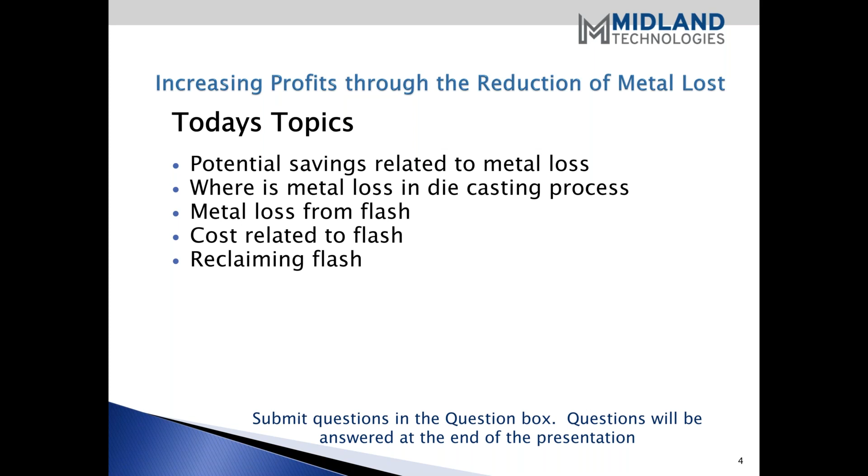Where is metal loss in the die casting process? Metal loss from flash, as we all know, and the cost related to flash, and also reclaiming flash. We'll also cover causes of problems with remelting flash, and methods of reducing flash. We'll actually go through an actual experience with a die caster, and talk about different methods of evacuation and savings calculations. So we've got a lot on our topics today. Again, if you have any questions, please submit them in the question box or chat box, and we'll answer those at the end of the presentation.

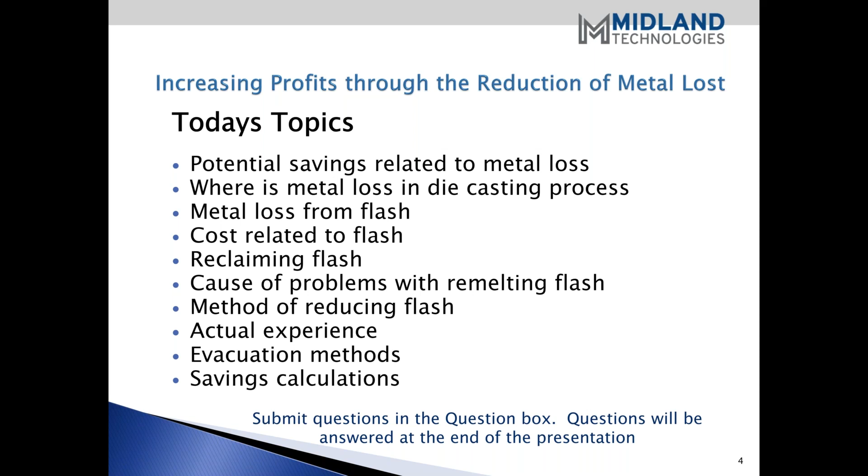The first topic is potential savings related to metal loss. Of course, the advantage of the die casting process is the capability to recycle material, and I think we're all aware that's something each die caster is trying to do. That recycled material can come from runners, overflows, gates, and scrap that can be remelted.

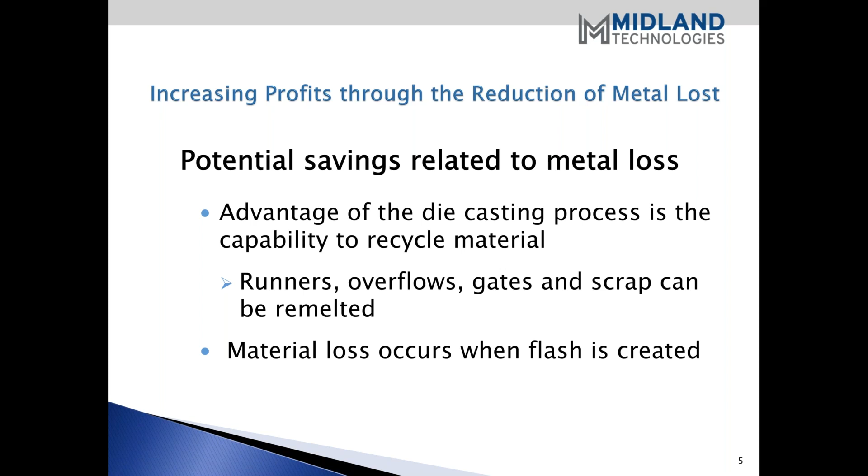Material loss then can occur when flash is created. Where is the metal loss in the die casting process? With flash, overheating metal in breakdown or holding furnaces, and improper metal handling and melting, will produce a scrap casting. Producing scrap casting is where metal loss can occur, and you can only reclaim a percentage of the metal. You can also have loss with biscuits, runners, gates, and overflows, and you can only reclaim a percentage of that metal as well. And of course, flash—unfortunately, flash cannot be reclaimed.

So I'll pass the presentation over to Larry.

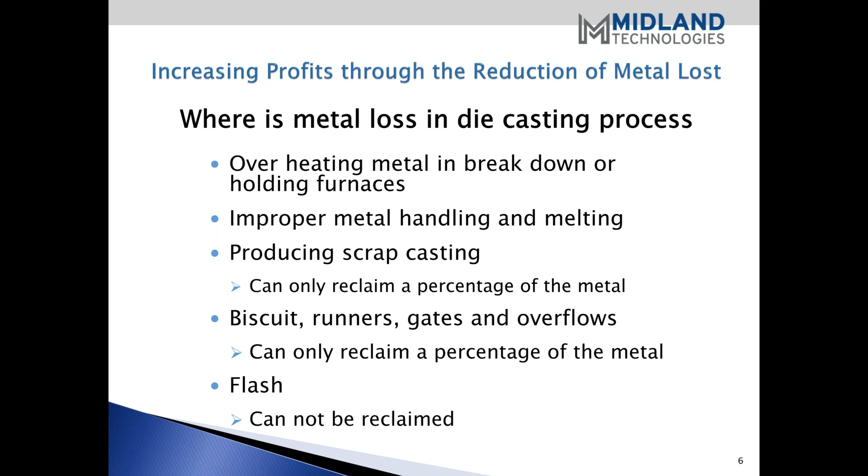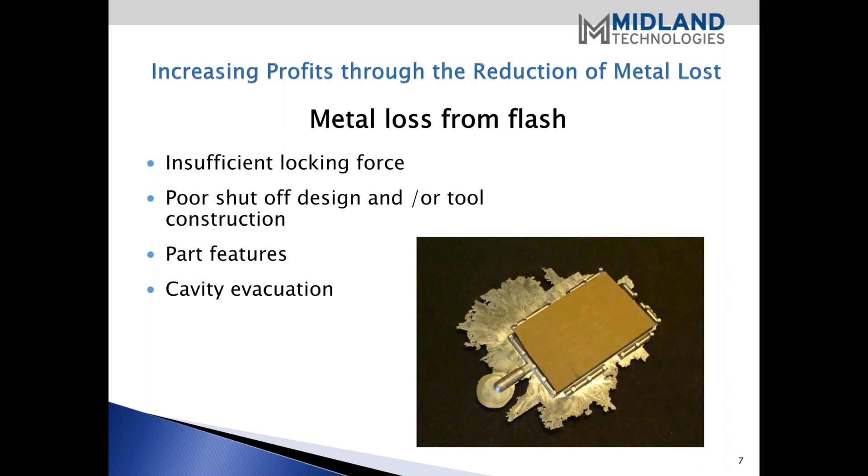Some of the flash, if it's clean, if you talk to your smelter about it, you'll find they'll take the flash back sometimes. Other times you have to dispose of the flash, and in those instances, if you go to a landfill with flash, that's normally a cost to the die caster. And then, of course, you've got the cost of shipping the flash.

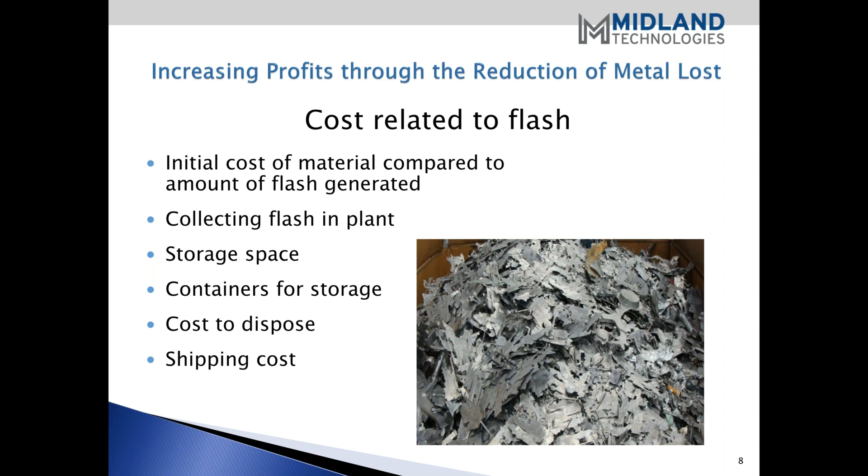Reclaiming flash—flash remelted is not reclaimable. The majority of it is just going to turn into, if you try to remelt it in your plant, and if you've done this, you know that it creates oxides. Those oxides not only affect the alloy itself, but they'll also decrease the efficiency of your remelt furnace.

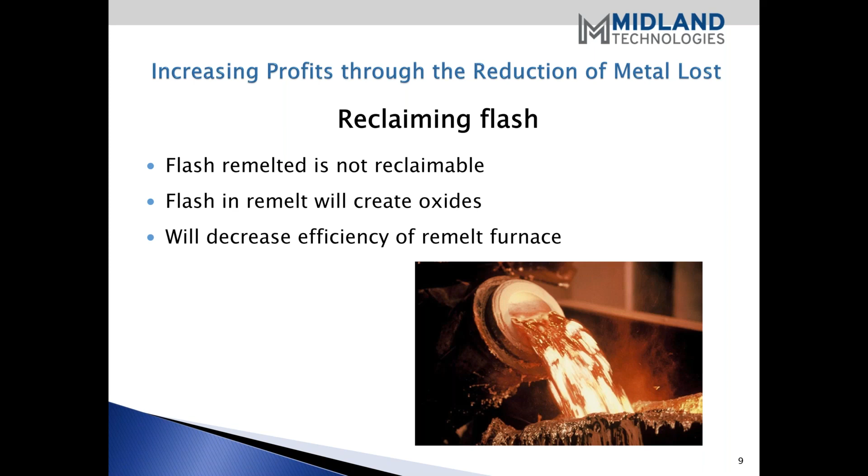So because of reclaiming issues with flash - thin flash, with thickness less than 25 thousandths, is pretty much non-reclaimable. Even smelters we've talked to agree. Our vents, at the atmosphere, are usually no thicker than 5 to 6 thousandths in a conventional vent, so all of that material is totally wasted.

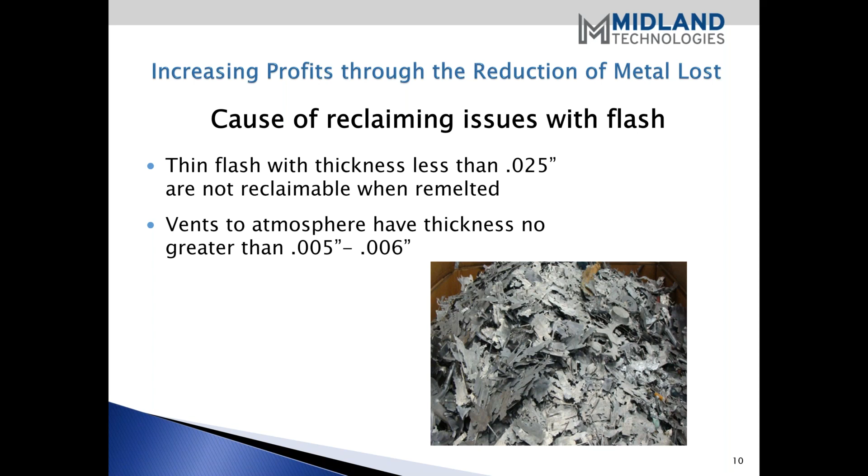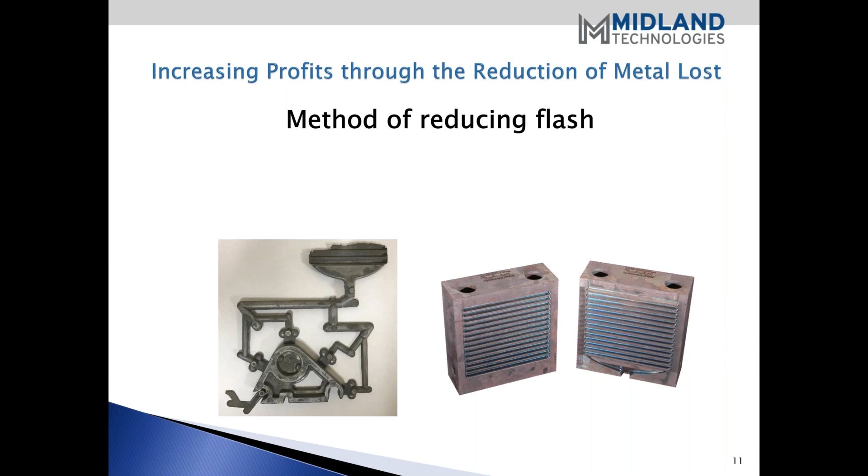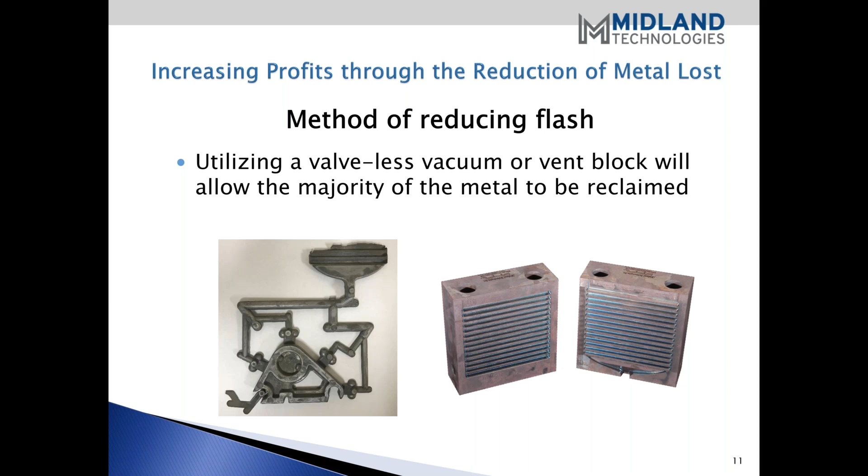Methods of reducing flash would be installing a method or series of runners using either a chill block or a valveless vacuum block. With either one, you can reclaim the majority of the flash as pictured here. The only portion you couldn't reclaim, even though it's over 20 thousandths thick, is the actually serrated portion of the vent or vacuum block, which could not be remelted.

Next we're going to talk about an actual experience that a die caster related to us. This die caster indicated he was losing flash, losing money and metal related to flash that was totally unreclaimable. He had very little success getting the smelter to give him anything for his reclaimed flash. In this instance, he installed a valveless vacuum block and was able to reduce his metal loss.

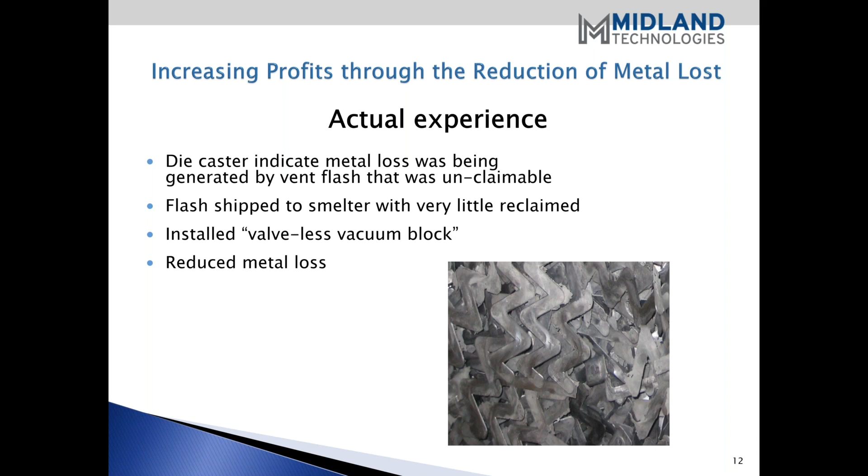Okay, and this is Bill Spracky again. I'll take it on from here. So the ways of reducing the metal loss would be we'll cover some of the evacuation methods.

So everyone's well aware of the conventional vent, where air is being pushed out of the cavity to atmosphere ahead of the metal or with the metal. In these cases, the vent system must be large enough to allow the air to escape. You can see the small area of metal going to atmosphere in the picture. Now the depth from the cavity or overflow to the edge of the insert is typically 20 thousandths, and from the insert to atmosphere you just have a very small depth of 0.005 inches. So it's not a real big area that you can cover with a conventional vent.

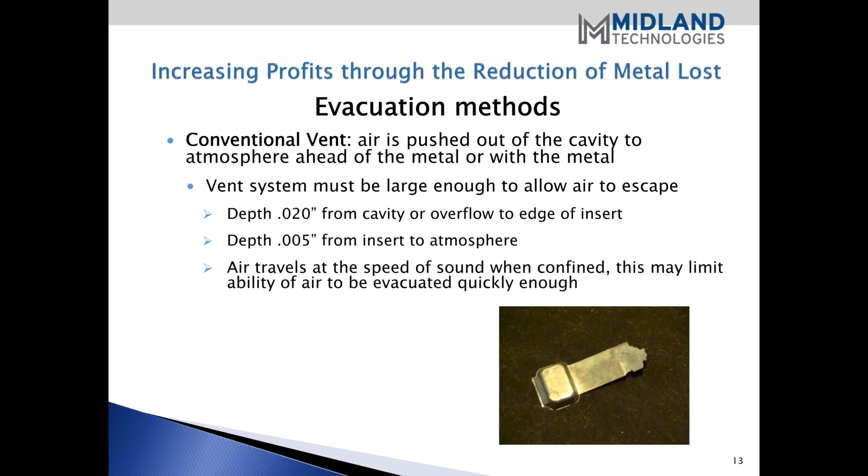Also you have to be concerned with, as the air travels through, air travels at the speed of sound when confined, and this may actually limit the ability of the air to evacuate. And of course, the flash is not reclaimable. You also have a few things that could fail to function, either with spray buildup, flash sticking in the vent, or when the vent gets peened over.

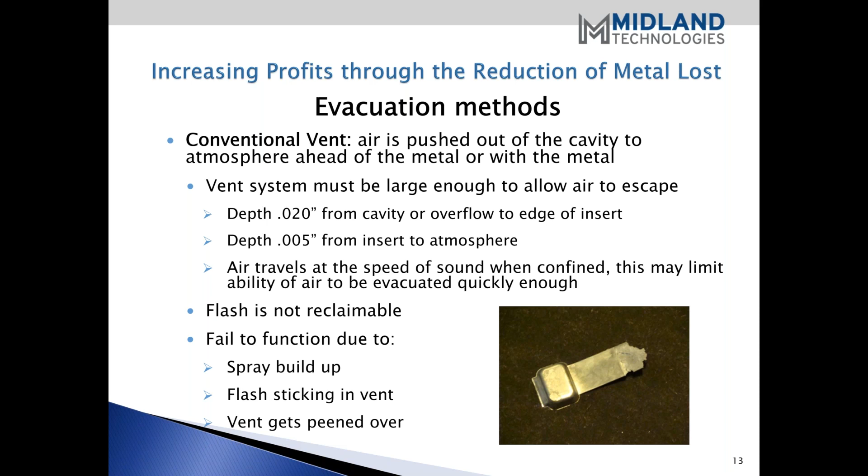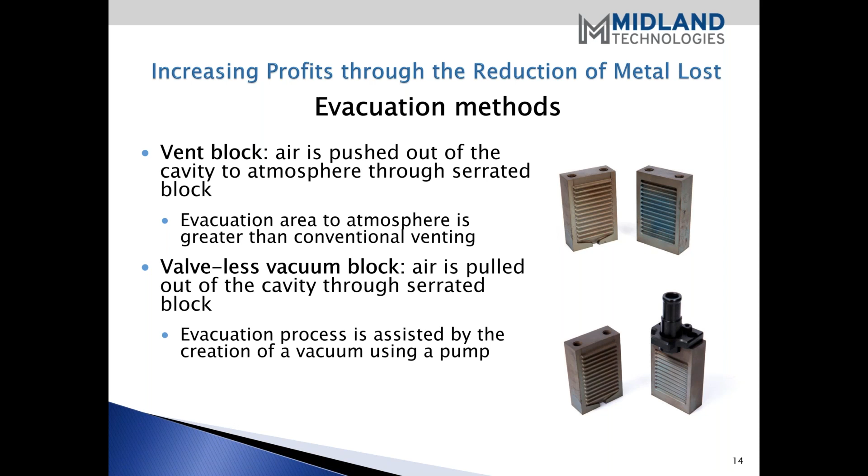The other method is with a valveless vacuum block, where the air is being pulled out of the cavity through the serrated block. Down in the lower right is an example of a valveless vacuum block with a round nipple that the vacuum hose would be attached to. The evacuation process is assisted by the creation of vacuum using a vacuum pump. The advantage here is that smaller passages can be used and less time is needed to evacuate the cavity.

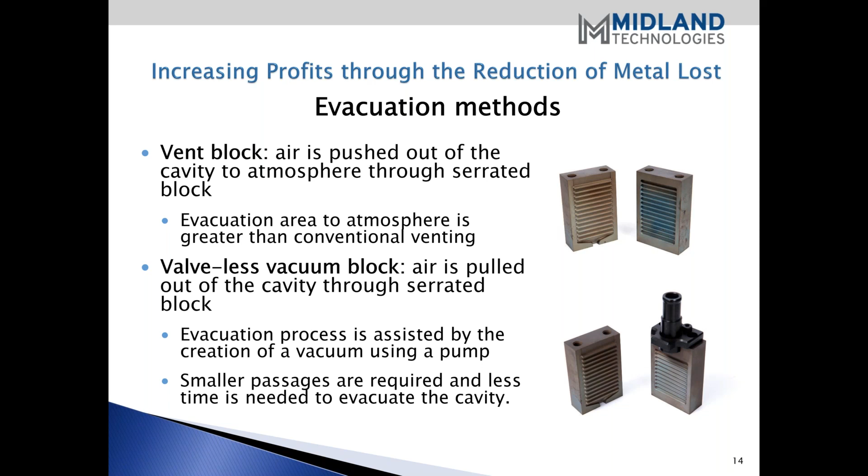Next we'll look at savings calculations. With the die caster we previously talked about, they had a situation where the vent area required was 0.067 square inches, and the total weight of the flash they were getting was 0.146 pounds. Vent dimensions were 0.025 to 0.005, vent length average 3 inches by 1 1/8 inch, and the total vent width required was 0.067 square inches divided by 0.005 - you needed 13.4 inches of conventional venting for this application.

They converted to a vent block using a 4,000 size block, which has an evacuation area of 0.070 square inches. With the conventional vents, the metal loss cost was basically 0.146 pounds times your average cost for aluminum of $1.35, so they were losing 0.197 per shot.

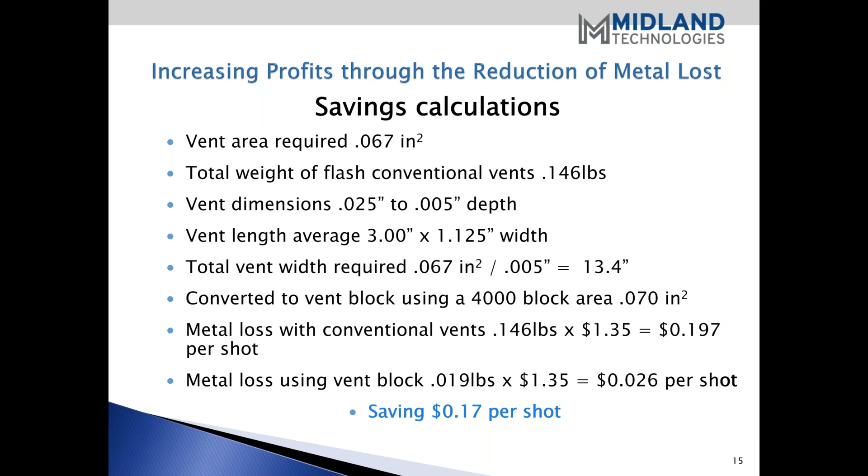So with the savings calculations for a whole year, the average shots per hour from the machine utilized in this case was 12 and a half hours per day, average 85 shots per hour, giving just over 260,000 shots per year from one machine. So the potential yearly savings in unreclaimed metal would be 17 cents times the 260,000 plus shots, giving a savings of $44,253 per machine - quite a big savings.

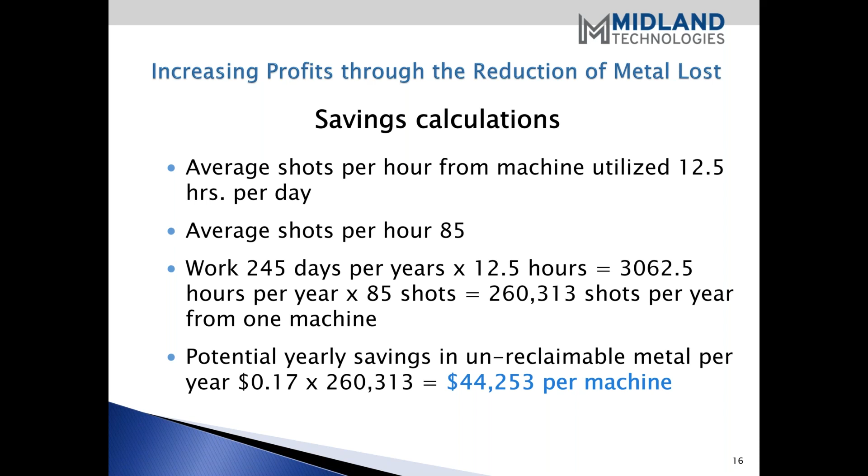This savings does not include reduction in scrap with adequate cavity evacuation. But you get a good turnaround with your investment in a serrated block, a vent block, or a valveless vacuum block. Those are the benefits we see when people switch from conventional venting to this style of evacuation.

And with that, ends the topics, and now we are open to any questions that you might have. Let's see if we have anything here. It doesn't appear we have any questions.

Okay, well anything you can add at all, Larry? I've experienced this myself in plants, and a real quick check you can make on jobs that you're suspecting may be candidates, number one candidates, because of probably running scrap, that's what motivated me in plants to utilize blocks instead of using conventional vents.

You can see how much potential savings you can realize by using either one of them. Not only that price, but as Bill mentioned, in reducing the scrap itself in your plant, you can realize quite a bit just by using a chill block.

All of that, the runners and so forth, can all be reclaimed. The majority of it's all reclaimed when you remelt. Again, obviously, because of the thin vent, you can't reclaim it. I think the area that you have available for putting in the conventional vents - in some cases you need quite a few conventional vent tracks out to atmosphere.

And when you switch over to a chill block, you may have less need for area to put that block in, and it might be an easier time as far as designing room for a block, or a chill block. So it's certainly something to consider when you are designing your outlet runners.

Right, and the other advantage I've experienced is the fact that when you use these runners, you're tying everything together, material-wise. I've had experiences running in plants where we used overflows, and usually in a lot of cases die casters will attach a runner from overflow to overflow so that they're connecting them so they can be easily handled as scrap.